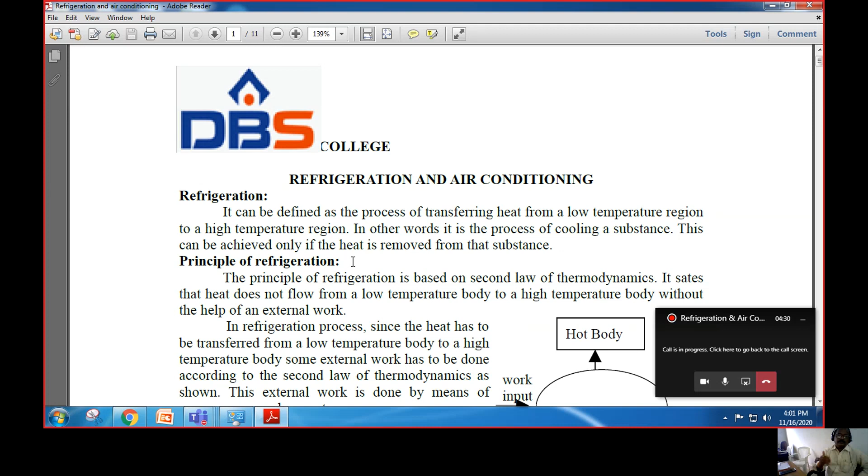Coming to refrigeration, refrigeration is a branch of engineering to produce low temperatures, or to maintain low temperatures. We can also say it is a process of cooling a substance. How do we achieve this? By removing heat from any body, we can reduce the temperature. This is the basic principle behind refrigeration.

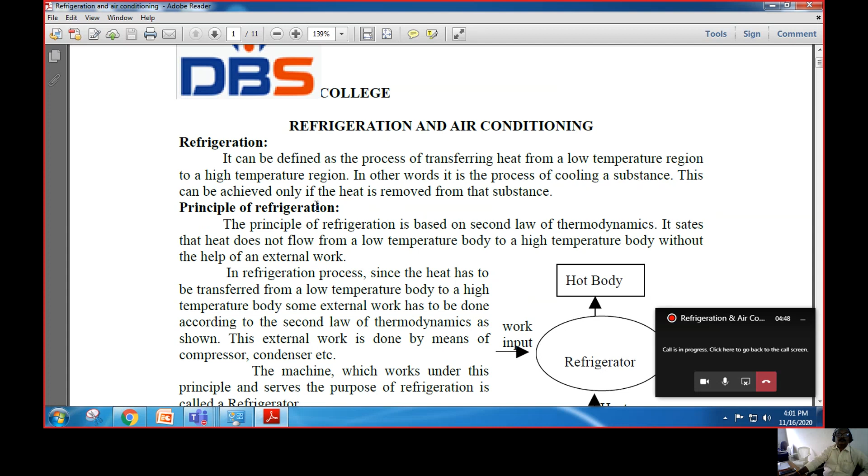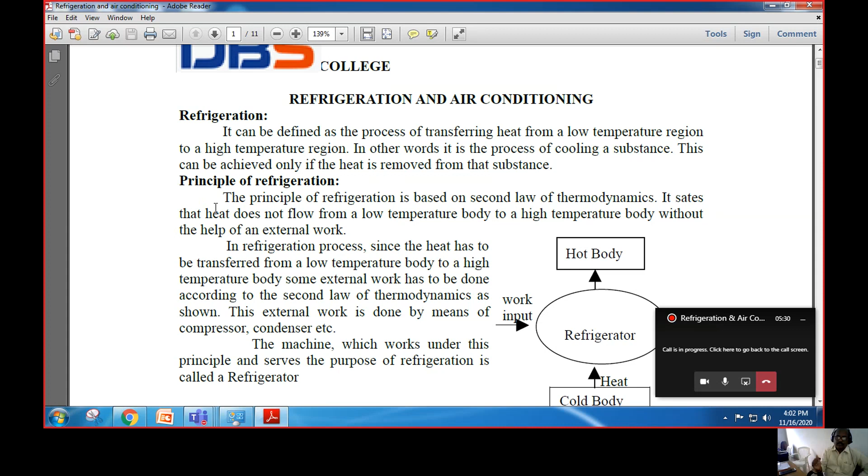The principle of refrigeration is developed based on the second law of thermodynamics. What is the second law of thermodynamics? It states that without the help of any external agency, we cannot remove heat from a low temperature to a high temperature. That means if you use some external work or agency, we can remove heat from low temperature to high temperature. If you start removing heat from the low temperature body, it reduces further, and we can produce low temperatures. This production of low temperature is called refrigeration. So refrigeration is developed based on the second law of thermodynamics.

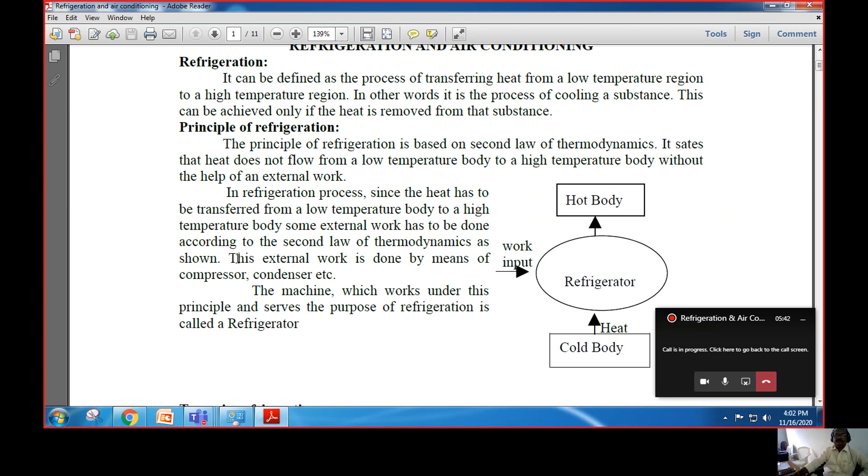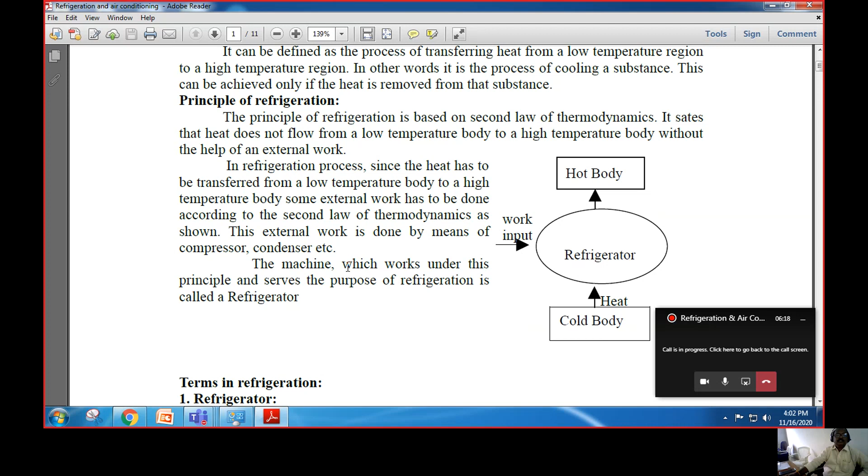If you observe this diagram, there is a hot body and a cold body, and in between there is a refrigerator. This refrigerator takes power from outside and starts removing heat from the low temperature to the high temperature. If it continuously removes heat from the cold body, its temperature can be reduced further, and like that we can produce low temperatures. That is called refrigeration. So we define the machine which works under this principle and serves this purpose as a refrigerator.

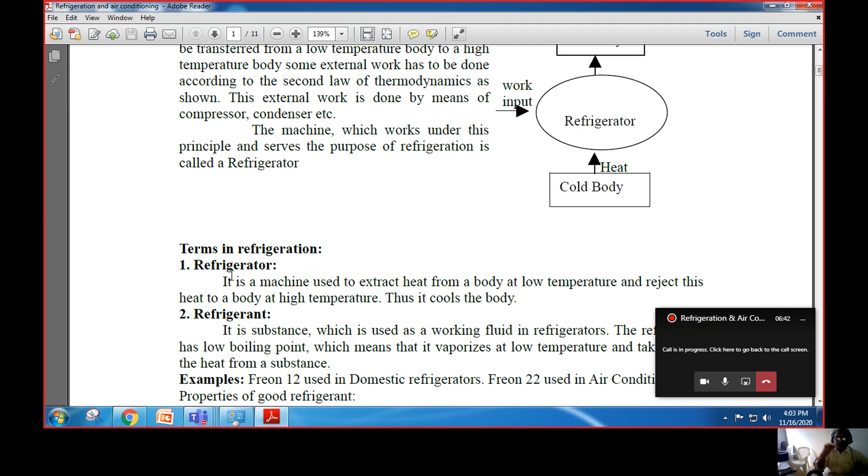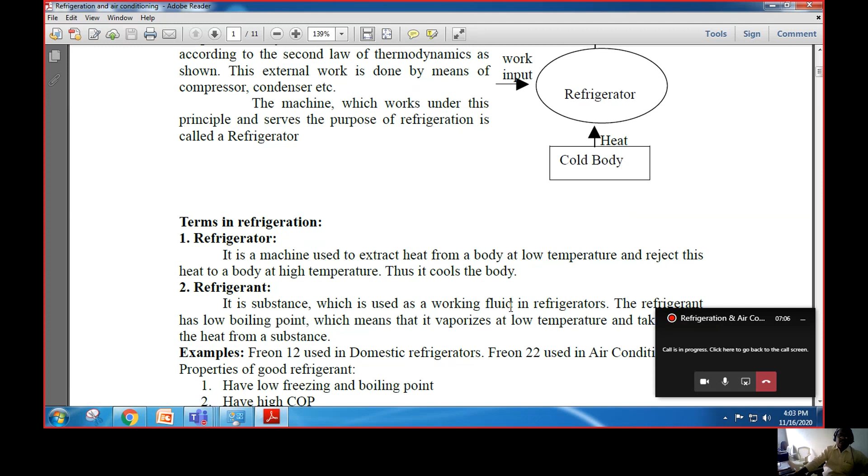In refrigeration, we should know some terminology. First, refrigerator - it is a machine which produces low temperature. Next, refrigerant - it is a substance used in a refrigerator, it is the working fluid in a refrigerator. Based on the refrigerant, we can produce low temperature.

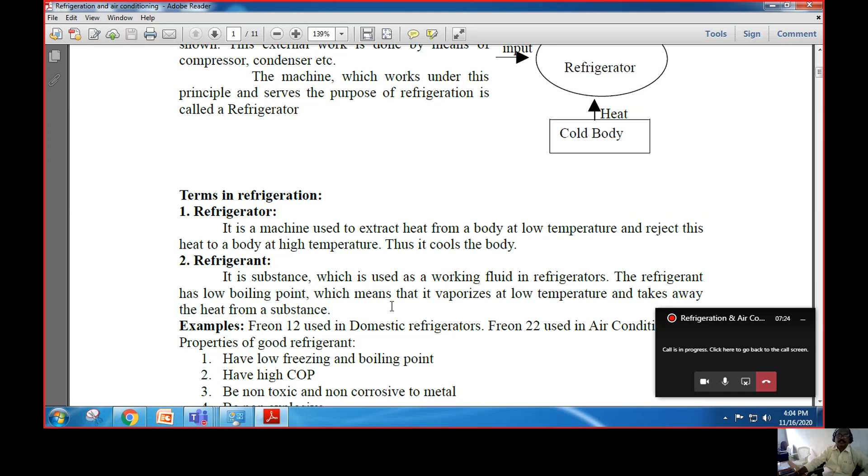The refrigerant has some specific properties. One specific property is that the refrigerant has a low boiling point, meaning at very low temperature it vaporizes. When it vaporizes, it takes heat from the substance - whatever heat is available there is taken away by the refrigerant as it becomes vapor. That is the quality of the refrigerant, and based on this quality, refrigerators work.

Generally, we use Freon 12 as a refrigerant in domestic refrigerators, and Freon 22 is used in air conditioners. Besides Freon 12 and Freon 22, there are many other refrigerants available - even ammonia can be used as a refrigerant.

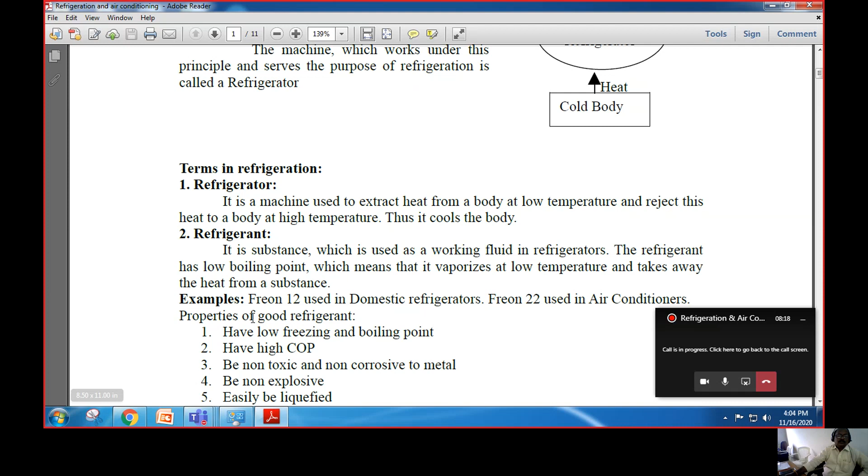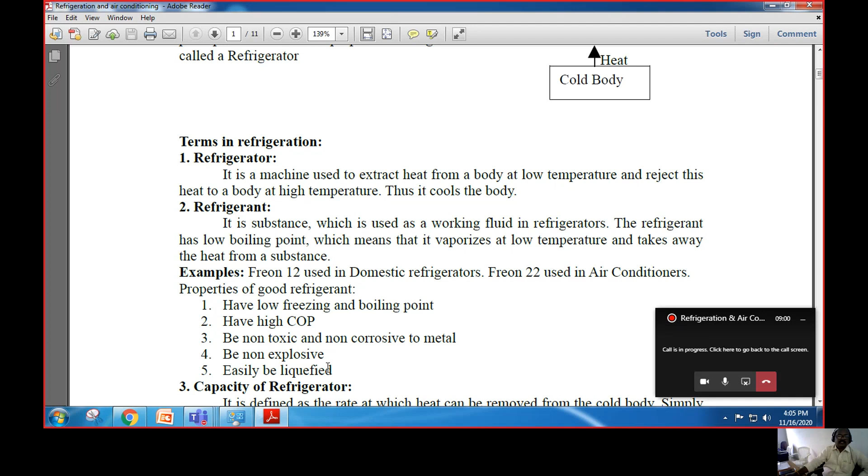Coming to this, there is one more term called capacity of refrigerator. Generally, refrigerator capacity is measured in terms of tons of refrigeration. If you want to rate the capacity of any refrigerator, we use a specific word called ton of refrigeration. That is the capacity of the refrigerator. What is the meaning of ton of refrigeration?

It is defined as the rate at which heat can be removed from the cold body. Simply, it is the rate at which refrigeration can be produced. The unit is ton of refrigeration, so ton of refrigeration is the unit of refrigeration.

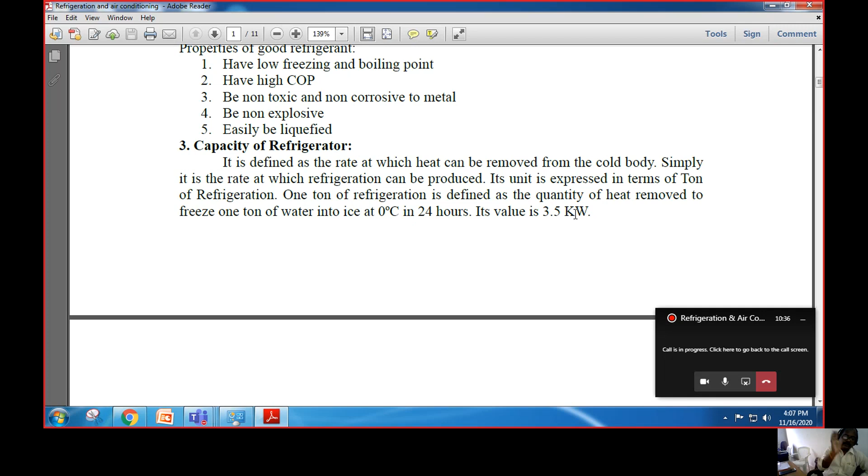What is the meaning of 1 ton of refrigeration? It is defined as the heat removed to freeze 1 ton of water into ice at 0 degrees centigrade in 24 hours. That is the meaning of 1 ton of refrigeration. The value of 1 ton of refrigeration is 3.5 kilowatts. So 3.5 kilowatts of power is required to convert 1 ton of water into ice within 24 hours.

There is another term called refrigeration effect. Refrigeration effect means heat removed per unit time. The amount of heat removed from the cold body per unit time is called the refrigeration effect. This is a very important parameter as far as refrigeration is concerned. So our outcome is refrigeration effect, which means heat removed per unit time.

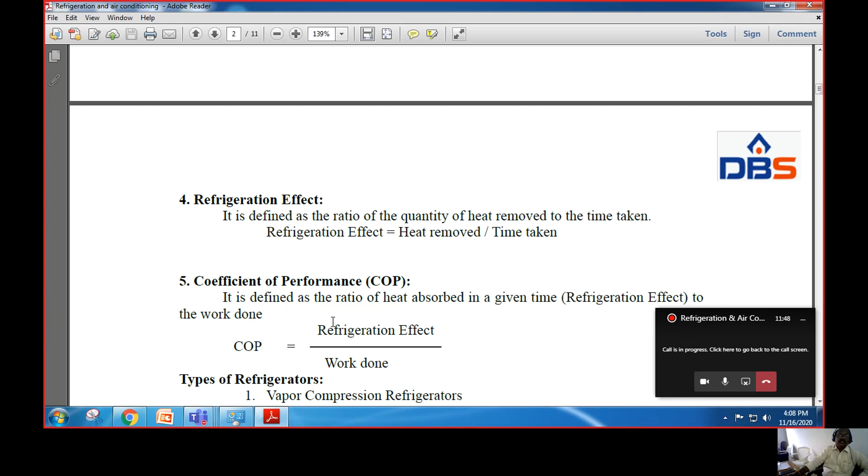There is another important terminology in refrigeration called COP, coefficient of performance. If it is an engine, performance is measured in terms of efficiency, but refrigerator performance is measured in terms of COP. COP means it is a ratio of refrigeration effect by work done.

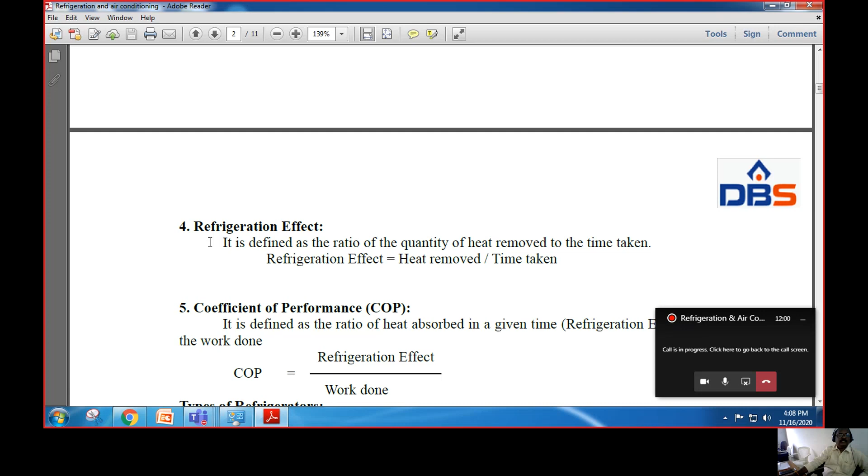So these are the important terminologies we should know in refrigeration: what is meant by refrigerant, what is the meaning of capacity of refrigerator, what is meant by refrigeration effect, and what is the meaning of coefficient of performance.

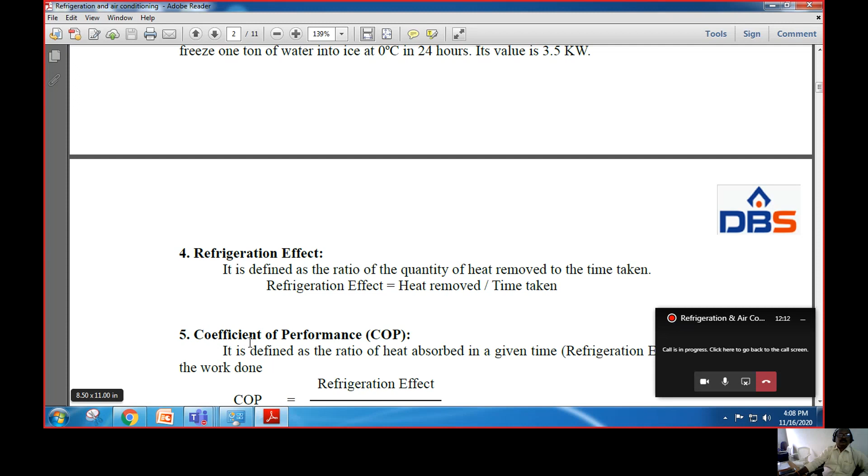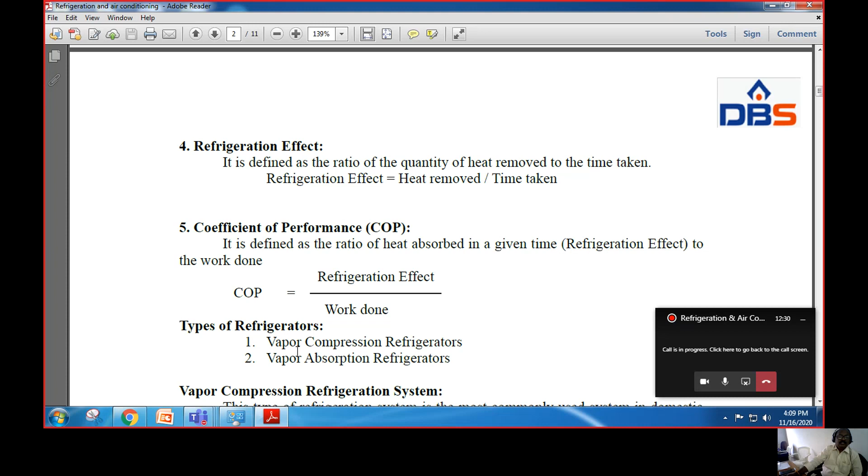Coming to refrigerators, there are two types of refrigerators: one is vapor compression refrigerators, another one is vapor absorption refrigerators. We'll discuss one by one.

The first one is vapor compression refrigeration system. In this system, the refrigeration is produced based on the compression of the refrigerant. This type of refrigeration system is the most commonly used system in domestic refrigerators. In all our domestic refrigerators, we are using vapor compression refrigerator systems.

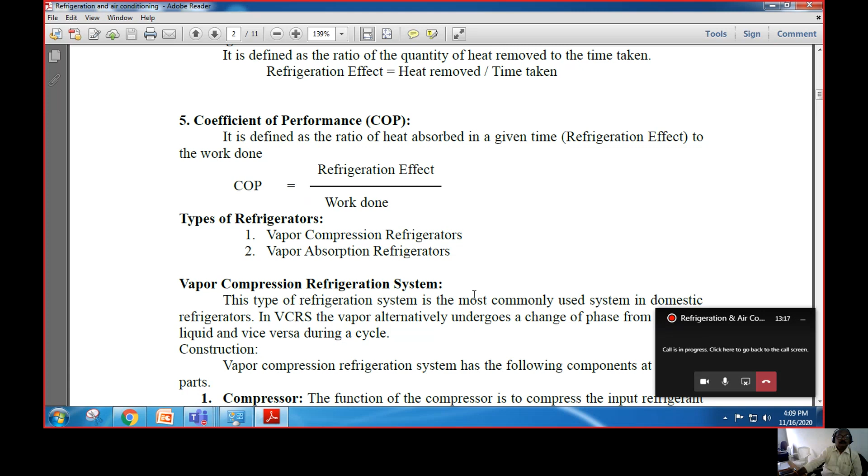In vapor compression, alternately there is a change of phase of the refrigerant from liquid to vapor and vapor to liquid. Based on this change of the refrigerant, the refrigeration effect is produced.

In this vapor compression refrigerator, there are 4 stages: one is compressor, another one is condenser, third one is expansion valve, and fourth one is evaporator. This vapor compression refrigerator consists of a compressor, condenser, expansion valve, and evaporator.

Inside this system, inside these pipelines, is filled with vapor refrigerant. Initially, the vapor refrigerant has low pressure, low temperature. This refrigerant is sent to the compressor, and once it is sent to the compressor, the pressure and temperature get increased.

This high pressure vapor refrigerant is sent to the condenser. Condenser means it is a cooling device. With the help of water or a fan, there will be cooling.

Due to the cooling, what happens? This high pressure vapor becomes high pressure liquid due to cooling, it condenses. Condenses means conversion of vapor into liquid. Here, due to condensation, this high pressure vapor becomes high pressure liquid.

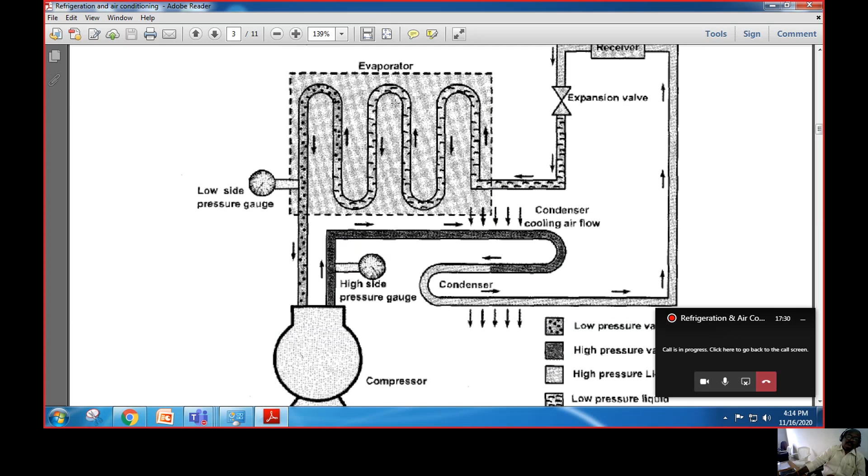So this is the mechanism in vapor compression refrigeration system. It consists of four components: compressor, condenser, expansion valve, and evaporator. Inside this system, there is a refrigerant circulating. Due to change of phase, continuously it removes the heat from the evaporator. Like this, we can produce very low temperature in the evaporator. So this happens in the vapor compression refrigeration system.

This vapor compression refrigeration system we are using in domestic refrigeration system. All our domestic refrigerators are vapor compression refrigerators.

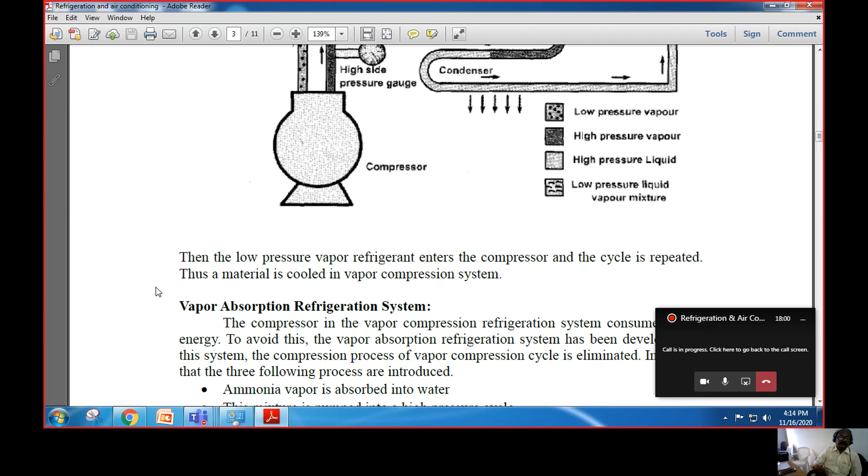So there is one more refrigeration system, that is called vapor absorption refrigeration system. It has some advantages. Due to this vapor absorption refrigeration system, we can reduce the power consumption. The vapor compression refrigeration system consumes a lot of energy. To avoid this, vapor absorption refrigeration system has been developed. In this system, the compression process of the vapor compression cycle is eliminated. So in vapor absorption system, there is no compression.

Instead of compression, there is one more stage, that is heating. Instead of that, the following process are introduced. Here in vapor absorption system, we are using ammonia as the refrigerant. This ammonia is absorbed into water. We mix it into the water. The mixture is pumped into the high pressure cycle, and the solution is heated to produce ammonia vapor.

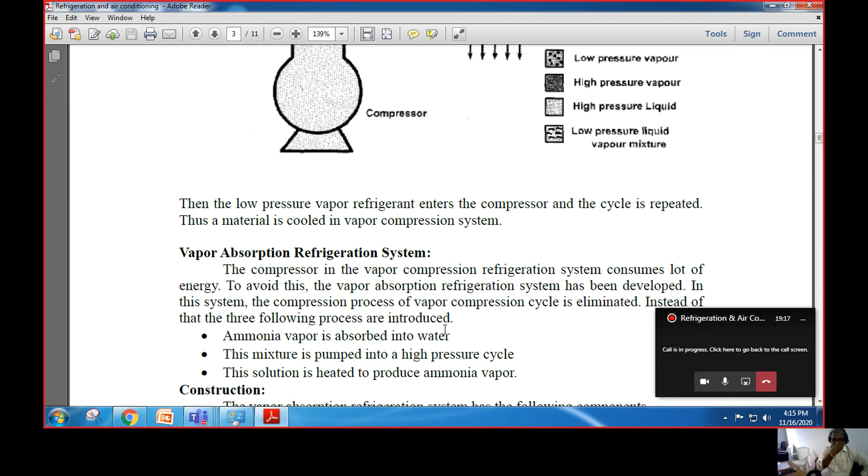So these are the three stages: initially we mix ammonia into water, again by heating we separate the ammonia. We will see what happens.

In this circuit also we fill ammonia, using it as a refrigerant, in the pipelines. Initially the ammonia is mixed with the water. This ammonia water is pumped to the generator. In the generator there is a heating coil, so heating takes place. Due to heating, ammonia gases, ammonia vapors are separated.

Ammonia vapors are separated and go to the condenser. This is high pressure, high temperature ammonia vapor. It goes to the condenser, where cooling takes place. It condenses, meaning it becomes liquid - high pressure liquid ammonia.

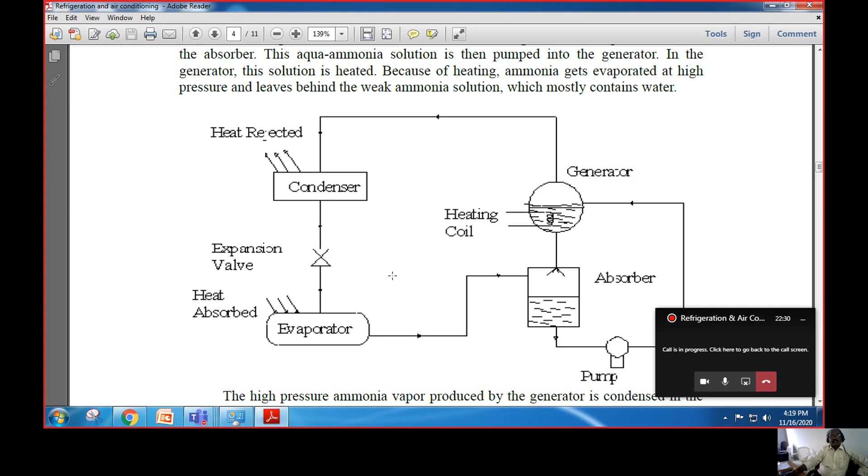So with very less energy, we produce the low temperatures in case of vapor absorption system. These vapor absorption systems now we are using for commercial applications, since it consumes very less power.

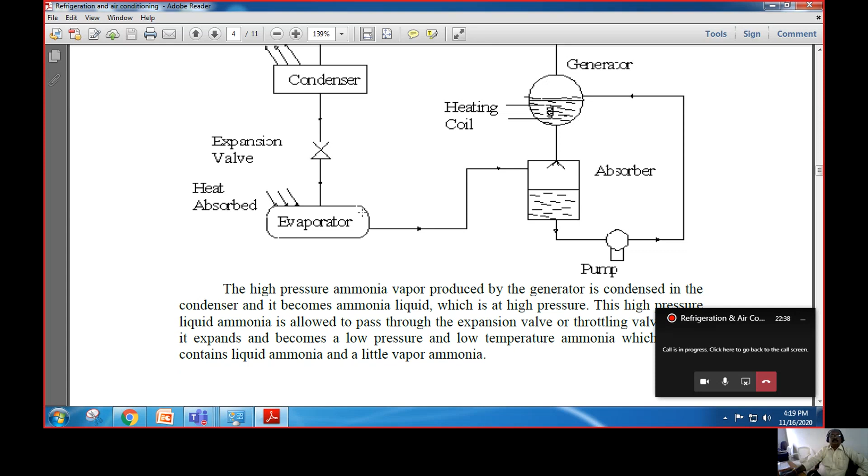Okay, so now we have discussed both the systems, vapor compression refrigeration and vapor absorption. We'll see some differences between vapor compression and vapor absorption.

In vapor compression, there is more noise, and wear and tear takes place due to moving parts. But in vapor absorption, since there is no compression, there is no noise. In compression, mechanical energy is utilized by means of a compressor. Here only heat energy is used, and any waste heat also can be used in case of vapor absorption system.

In vapor compression refrigeration system, refilling of refrigerant is easy. But here refilling of refrigerant is difficult, because ammonia is a little bit of a dangerous gas, so that is a little bit difficult.

In vapor compression, during partial loading conditions, the performance is affected, but it is not affected due to partial loading in case of vapor absorption. In case of vapor compression, the liquid refrigerant accumulated in the cylinder may damage the cylinder, so preventive measures are needed.

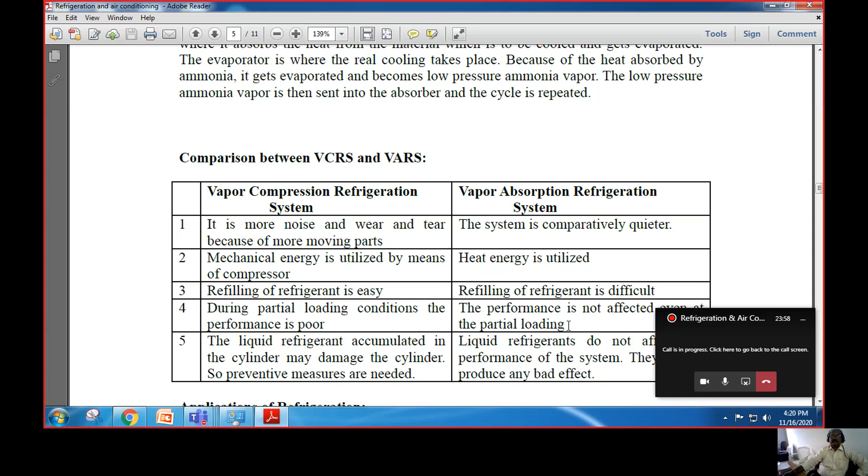The refrigerant may damage the cylinder parts, but here this liquid refrigerant does not affect the performance of the system. It does not produce any bad effect either.

So by comparing these things, vapor absorption refrigeration systems have many advantages compared to the vapor compression refrigeration system.

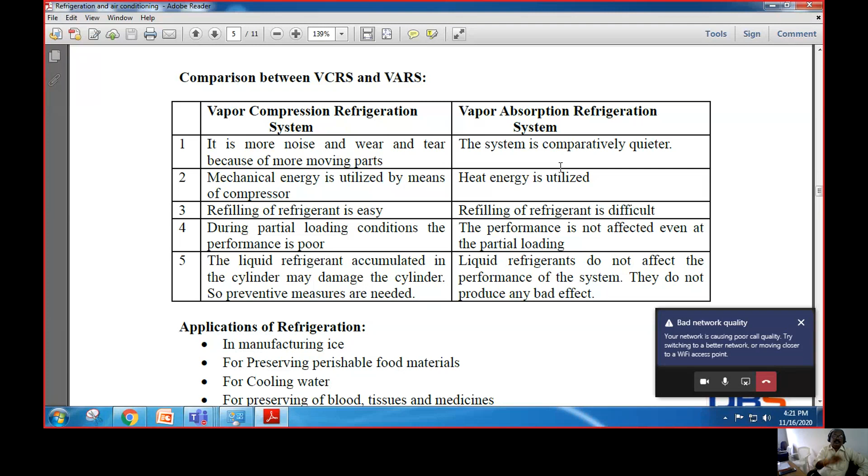What are the applications of refrigeration? This refrigeration system we are using for many important applications like manufacturing of ice, preserving perishable food materials, cooling water, preserving blood, tissues and medicines, and for concrete setting in very big structures like dams. Refrigeration is required there too.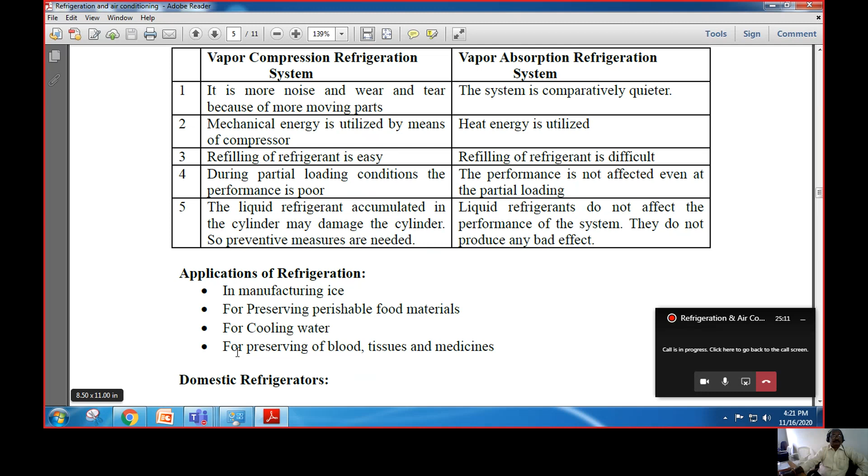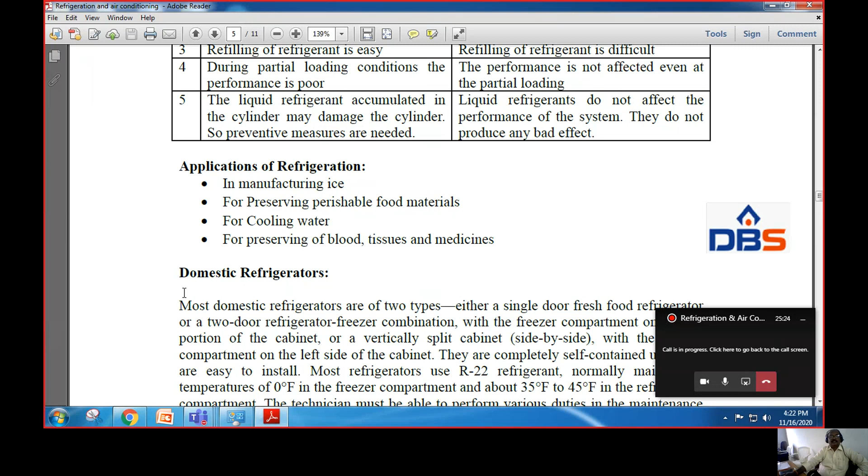So these are the major refrigeration systems in refrigeration. Apart from this, there are some domestic applications called domestic refrigerators. Domestic refrigerators are the refrigerators we use in our houses for preserving material.

These domestic refrigerators are of two types: single door refrigerators and two-door refrigerators. In a single door refrigerator we only preserve fresh food. In a two-door refrigerator, we maintain a freezer chamber separately.

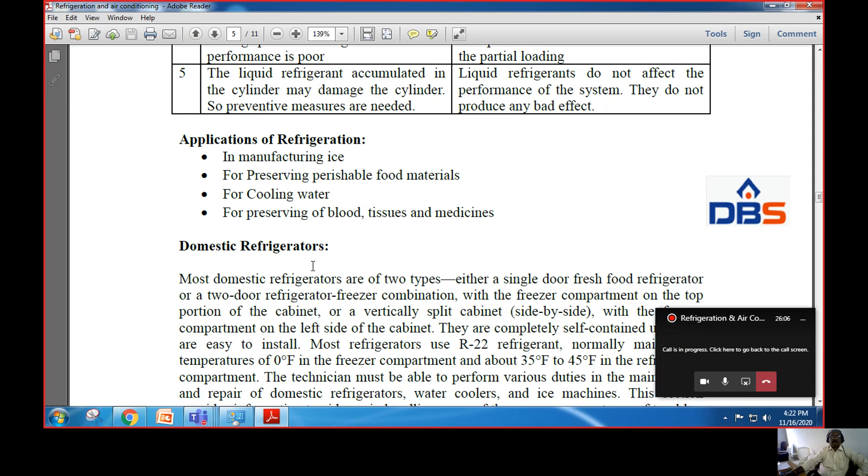If you observe, in a two-door refrigerator there is a freezer chamber. In the freezer chamber, the temperature is 0 degrees Fahrenheit.

In the freezer chamber we use to produce ice and to store material at very low temperatures, like preserving ice creams and some important food materials. Their temperature is 0 degrees Fahrenheit.

The remaining main chamber temperature will be something around 35 degrees Fahrenheit, while the freezer is 0 degrees Fahrenheit. So there will be two doors, designed in such a way that the freezer is 0 degrees Fahrenheit and the remaining chamber is 35 degrees Fahrenheit.

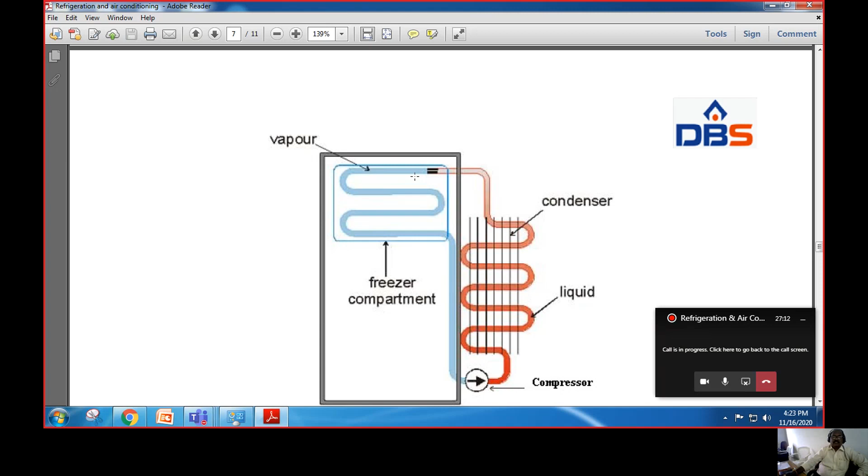Here we are using vapor compression refrigeration system for domestic refrigerators. There is a compressor, which we keep outside the refrigerator. The compressor is connected to the condenser tubes, and from the condenser, somewhere there will be an expansion valve.

After the expansion valve, the pipes are arranged in an evaporator. The entire inside portion of the refrigerator acts as an evaporator. Due to this design, we maintain different low temperatures at different portions of the refrigerator.

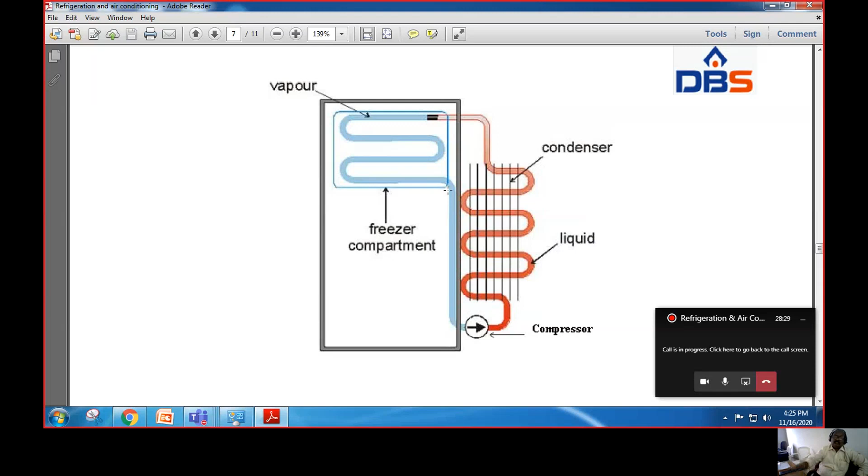So domestic refrigerators are designed in two types: single door refrigerators and two door. In two door refrigerators, there is an ordinary refrigerator and a freezer, where we maintain 0 degrees Fahrenheit.